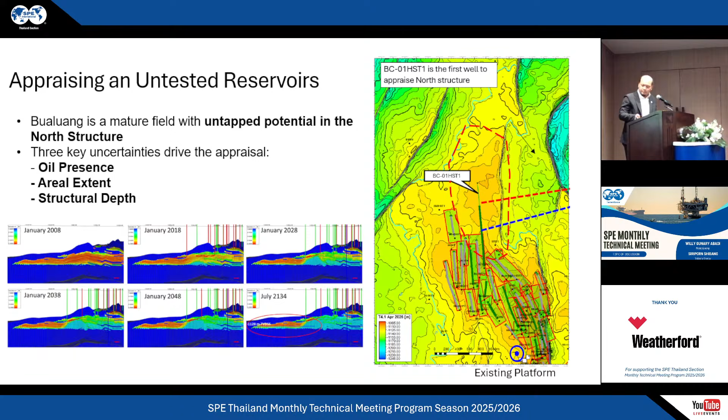Okay, let me go through one by one. First of all, the depth uncertainties and appraisal challenge. If we shoot the 4D seismic, there are still remaining uncertainties in terms of the depth, because we need to convert the time to depth with the velocity, and we still cannot get that from the 4D seismic for that area. The other thing is the structural complexity itself, because it's a fluvial sand, and as you can see here the structure is not smooth, it's coming up and down.

And last but not least, we cannot resolve this by the 4D seismic, because the uncertainty of depth cannot be resolved itself. So if we shoot the 4D seismic, the vintage seismic and the new one will result the same. That's why we eliminate the 4D seismic to appraise this location.

The next one is the reservoir challenge itself. As you can see from the left pictures, we are in fluvial depositions, with a kind of vertical accretion deposit model. So when you have a channel, the next new channel will erode the old one. And what we can see from the recent condition looks like this. This picture is along the horizontal wells in the past, and this is the PeriScope image result from this well.

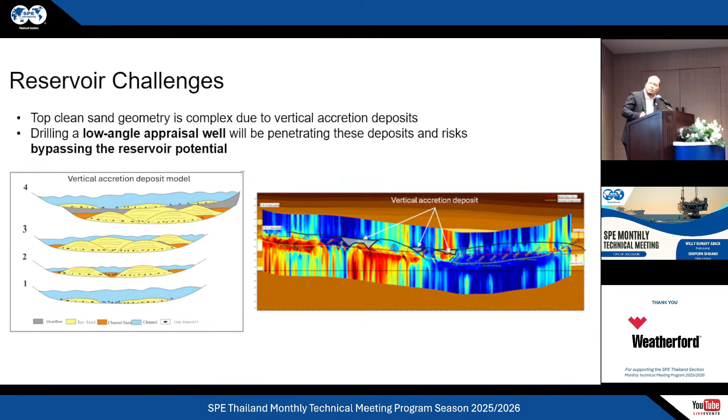So now the only option is drilling from our existing platforms and drilling horizontal wells. So this is our strategy actually. So we sidetrack from the existing wells. The original borehole that we chose is directed in the same direction, going to the north. And by drilling from the existing platform, we have a benefit. We can produce right away after we drill the well and prove the oil is there. And apart from that, the long horizontal wells are also able to maximize the reservoir contact, and we can combine the appraisal and production in a single well.

So as you can see here, you see the strong green stick here and the light green stick here. That's basically the target of the production section, where we are sure the oil's there. And the remaining light green stick here is basically the appraisal objective. So we are not really willing to complete that one. That's why we are drilling the horizontal well confidently, basically to complete until the production section, and the remaining we are going to use to appraise the north structure. And again, as I went through slide by slide, the long horizontal well is the best data acquisition to appraise this north structure.

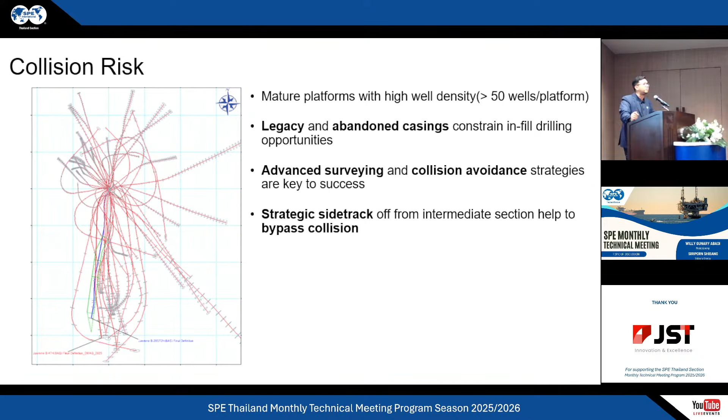On the engineering challenges, I divided them again into four. The first one is the directional drilling tools. With these tools, we have to start building angle with a dogleg of 5 up to 6 degrees per 100 feet at a very shallow depth. Drillers might know that building such angle in a very shallow formation is challenging. We're talking about making a dogleg of 5 degrees per 100 feet at a TVD of 1,200 feet in general. It's extremely soft, extremely challenging, and we deployed a very advanced and unique RSS, which is not commonly deployed in the region.

And we have to be drilled with a very experienced one that has the experience of the field, the one that knows how to work with the technology. And it was configured with a low flow, right? Because the challenge is always to drill with a high angle, and in the soft formations, how to avoid washing out your formations. So this technology is very specific that we deploy.

And together with Valeura and Medco, we deployed the stick slip reduction tool, right, to ensure that the energy that we transfer downhole translates into performance instead of shock, instead of high torque. So we want to ensure that energy is transformed into performance and a higher ROP, and reduce the torsional vibrations on the BHA, which eventually will improve the reliability of the BHA.

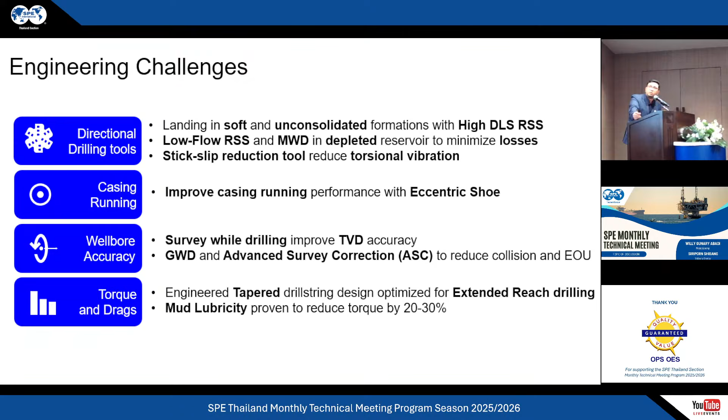On torque and drag, again, this well is considered ERD, where the drilling dynamics are important. It was designed to deploy an engineered tapered drill string, and then we also pump lubricants that help reduce the torque by 20 to 30%.

On the well placement, now we land the well safely in the reservoir. Now we are already in the reservoir, right? So we're very proud to share that 21 years ago we started well placement. We deployed well placement technology, but at the time we started with boundary detection. With boundary detection, it's only one layer, right? I'm not sure if I get. Yeah, this is one layer boundary detection.

Then over time, the technology evolved into multi-bed detection, and evolved again, the bottom one, into multi-layer mapping, right? So at the time, the technology was to help you stay within the boundary. As long as you know that you are within the boundary, it's good enough, right? And then the technology developed and transformed. In 2016, we don't talk about bed boundary anymore. We changed the terminology into reservoir mapping. We map the reservoir, not only helping you stay within the boundaries, but also helping us land the well precisely before you enter the reservoir, right?

So in the first three technologies on the left, typically the pilot hole was required. Right, the pilot hole gives the TVD, your marker, and then we land the well based on the pilot hole. That is where the failure came from, right? When you deploy technology where you can land the well without a pilot hole, you're saving 2-3 days of drilling the pilot hole. So this technology on the right, as SLB, I want to mention the brand, but I'll hold myself not to mention the brand. But the one on the right helps you land the well precisely.

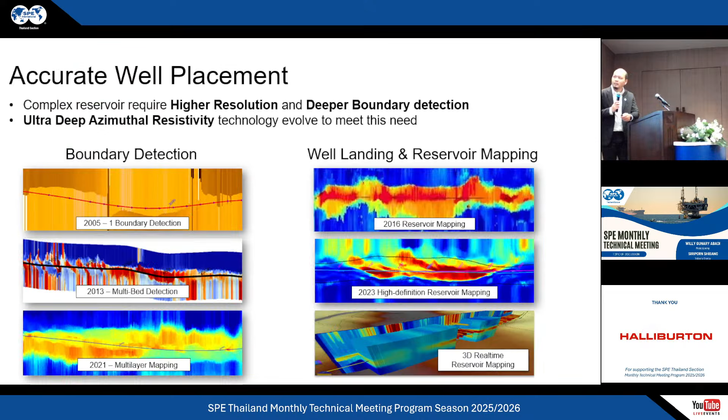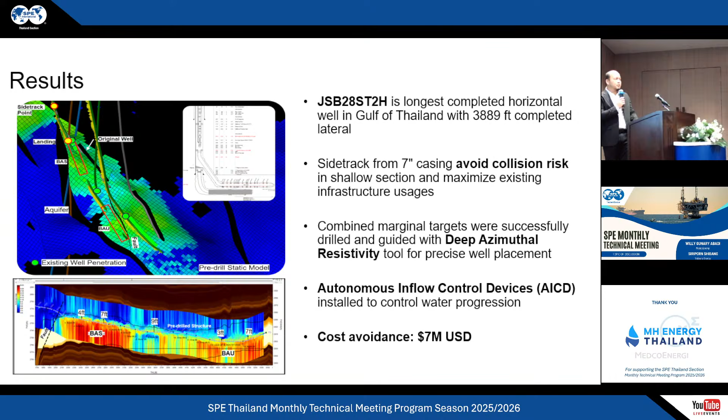So I think what both companies did, so this is in Jasmine in Valeura, they use the autonomous inflow control device to ensure that the distribution of pressure along this horizontal segment is equal. So the flow is almost equal from the heel and the toe. So if you can imagine in the drawing, this is how the completion looks like.

So we let the lateral be open hole, and then we put the open hole screen here with many open hole packers, and the way we put the packers is to make segments, and then we put the AICD or any kind of valve in order to control the production. So we would like to ensure that these long horizontal wells can contribute from the heel to the toe. So that's my short answer. I believe it's the same with Valeura as well. Yeah. And the second question.

That's horizontal well is our past and also the future. Yes. It is because for Valeura Energy, our reservoir, if we have deviated well, it cuts water very quickly. In order to maximize recovery of the reservoir, the horizontal well is the best technology that we need, especially the shallow reservoir that is unconsolidated. If we produce with deviated well, it will produce sand a lot, and the well will be not okay.